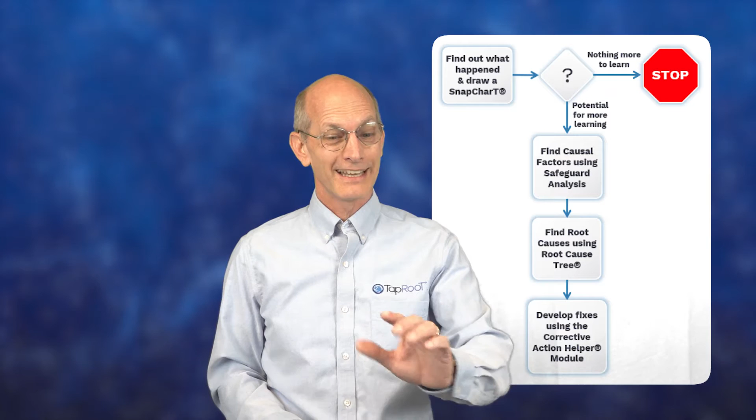So you can see in our process, our first few steps on here is gathering data, right? You have to have data in order to do a root cause analysis. So those are the first steps, is gather your information, find the problems, do your root cause analysis, and then all the way at the bottom, that's when you do your corrective actions. Okay? So don't start your corrective actions too early. That'll just cause you problems.

To go along with that, I mentioned that data collection. You can't do a root cause analysis unless you have some data to analyze. And we see this as a major issue where companies do not do a great job of collecting the right information. Right? They think they know the answers up front, kind of the first problem we talked about, and they just don't gather the right information to make sure they're not missing anything.

This information comes from many different places, right? It can come from interviews, when you interview people. They could be training records that you go take a look at. They could be going out to the physical location and taking pictures. All of these are data collection techniques, right? It's how you get your data.

And not only do you have to collect the data, but you have to properly format and display the data so it makes sense. And while some companies try to gather data, they oftentimes write it up in these big paragraphs of data on legal pads and then try to figure out what happened. And humans aren't good at that. Our minds don't work that way. We don't really do a good job of reading data and then analyzing it, right?

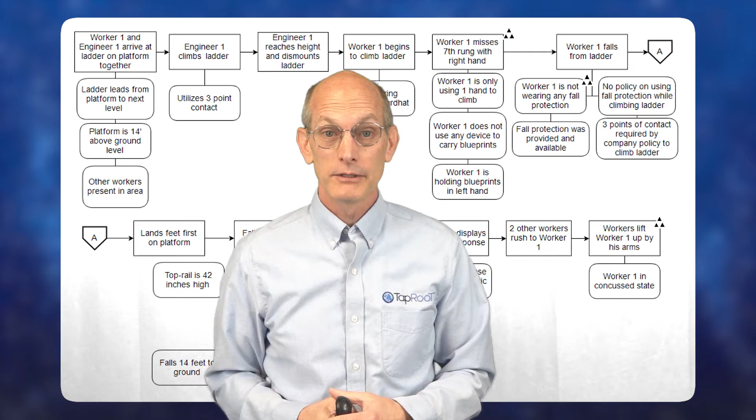We're very visual. And what we use in TapRooT is a flow chart; we call it a SnapCharT. But this is our way of displaying the data so that we can now analyze it as a proper root cause analysis. You can see what a typical SnapCharT or a flow chart would look like as you put it together. They're very simple to build. They're not hard. You can do them in software. You can do them up on the wall somewhere. Very easy to do.

But it's a critical step in your investigation process, gathering the data and displaying it so that you can properly analyze it. Okay, so again, we use SnapCharTs. If you use something else, that's fine, but this works really well for us.

Another problem we see with root cause analysis and incident investigations is not identifying the right root causes. And I know that sounds pretty broad, but more specifically, what we see companies do is they're identifying the error as the root cause. Now, I want to make sure it's clear. I've been doing this 18 years now. I don't think I've seen an incident investigation yet that didn't have a human making a mistake. It's pretty common. I mean, humans just screw stuff up because we're humans. It's what we do.

The problem is they are ready to put corrective actions in place here. They blamed this on the operator, right? So they are ready to correct this by doing something to that operator. I'm pretty sure I know what it's going to be. You're fired! And we haven't fixed the actual root causes of the problem. So yes, we must identify the errors, and then we do a root cause analysis to understand why smart people make errors. And that's what we're going to be doing next. We're going to be going through the root cause analysis to make sure we understand that.

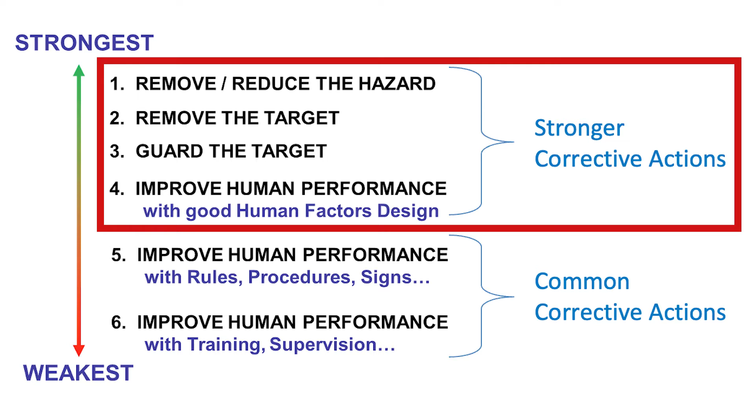And training people and writing a new procedure and putting a sign up, these are weak corrective actions all the way down here at the bottom, right? And yet, training, discipline, and procedures, there they are, number 5 and 6. The weakest corrective actions you can pick. We really want to work at the top here, right? Can I remove the hazard, remove the target, guard the target? Those are the things we want to do because they're more effective, right? It prevents the human from making those errors in the future.

So again, I'm not saying don't do procedures and training and discipline. You have to do those. They make sense sometimes. But if that's all you end up doing, you're kind of stuck. And in TapRooT, one of the things that we do is we offer what we call our corrective action helper. So for every root cause that you find in our system, we give you some best practice ideas on how to fix those. So it gets you out of this rut that you're in of just picking those 3 same corrective actions every time.

The last thing I wanted to mention in here is another problem we see with root cause analysis and incident investigations is that we think, and I don't want you to take this the wrong way, but we think we're smarter than we are. Okay, so we see a problem, we think we can get 6 really smart people in a room and we'll just figure it out, right? We'll figure it out because we're smart. We've seen problems, we're smart, we can figure this out.

I mean, that sounds great. And I really wish it worked that way, that I could always get the right 6 people in a room to talk about this and get the right answers every time. It just doesn't happen. There's advantages to getting people together to ask good questions and maybe build that chart that we talked about at the beginning to gather data and display it in a proper way. And these brainstorming sessions and learning teams are a wonderful way to do that. I think it's a good opportunity to get some extra experience in there and talk about things.

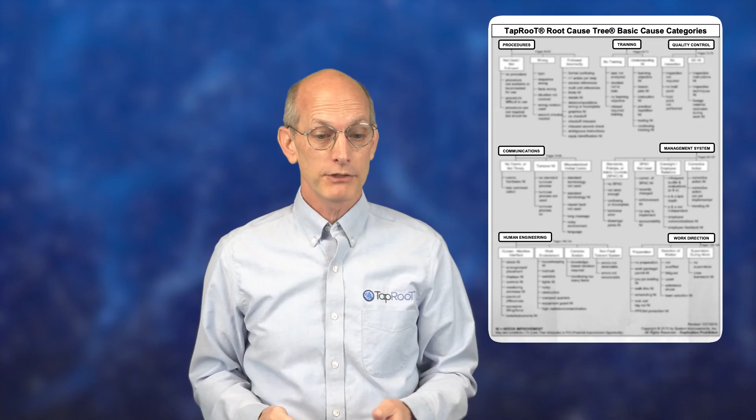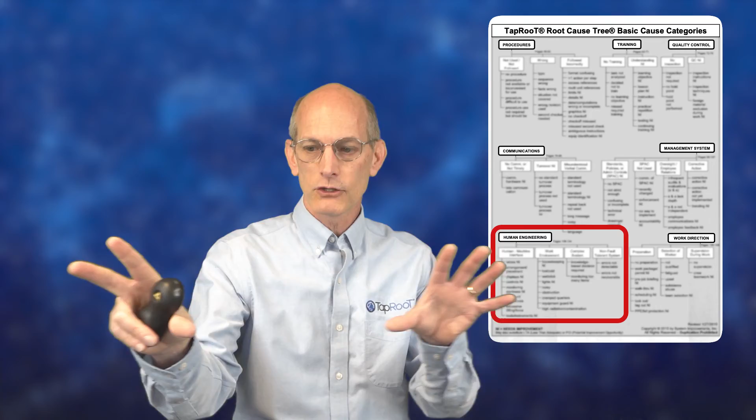You might find yourself in human engineering, where you're really focusing on design of the system and environmental conditions and everything, the interface between the human and the environment and the machinery. That is something that you probably are not trained in, right? So we're going to force you to go look at items like that.

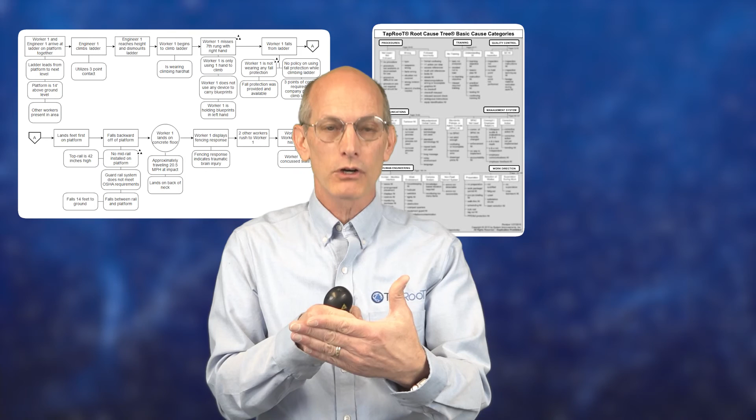So you're basically going to take this SnapCharT, this flow chart you built, you're going to do a root cause analysis on that, find some wonderful root causes, and now you have focused root causes to put corrective actions against. Much more effective corrective actions than just tell the guy to do a better job next time.

Okay? So, advantages to advanced root cause analysis. It's an expert system. It'll give you guidance to get to the right answers. So you as an investigator don't have to remember everything. We're going to guide you to the right answers. You're going to get the same answers a trained human performance expert would get. One thing I think we miss sometimes is the consistency you get from a structured system like this, right?

If I give the same investigation to 3 different 5 why teams, I'm going to get 3 different answers. I'll guarantee it. It's not the investigator's fault. They just have different experience levels. They're going to ask different questions. If you do a structured process like TapRooT, we're going to force you. I could give the same investigation to 3 different teams, and they're all going to get about the same root causes, right? It gives you a lot of confidence that the system's working properly, right?

And we also recommend that you use the system proactively. You don't have to wait, right? We don't have to wait until somebody gets hurt or you break something. You can go proactively, go look for problems, do root cause analysis on that. Use that corrective action helper that I mentioned to put good, solid corrective actions in place.

Another thing that we recommend is don't just limit yourself to health and safety issues. I know that's where most companies, for whatever reason, decide they're going to start with health and safety. And that's good. I mean, don't get me wrong. We want to keep our employees safe. We want to keep the environment clean. We want to have quality products. So health and safety is good. But any place you have humans involved, you can use advanced root cause analysis like TapRooT to help you with that. Okay? Any industry could use it.